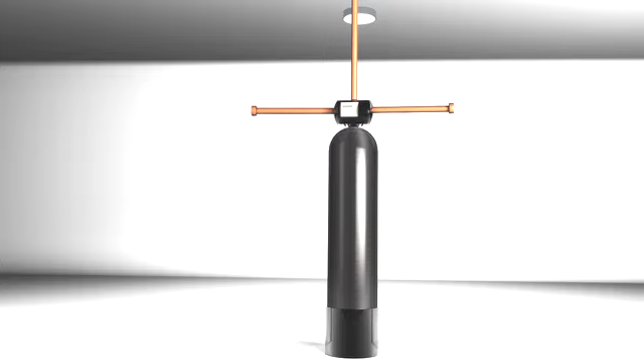From the simple to the more sophisticated, ProSystems products provide the very best in quality and performance. Our carbon filtration systems can provide bottled quality water without the bottle or the bother. And in this video, you'll see how it works. But before we see the process, it's important to become familiar with the elements of the system.

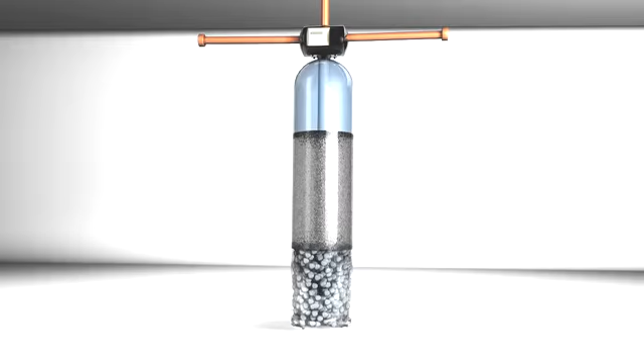First, we have freeboard. Freeboard is the area where carbon is allowed to expand. This allows the dirt that is collected on top of the carbon bed to be flushed out. Every regenerating filter system has freeboard.

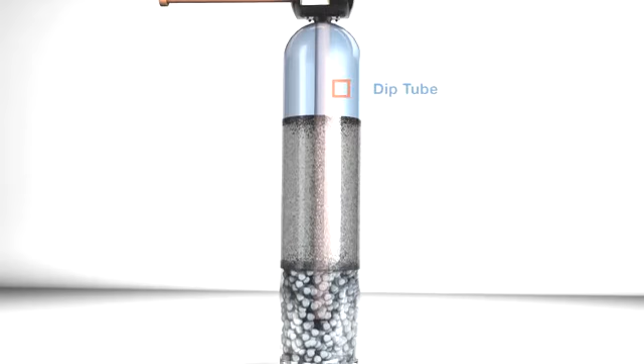Next, we have the dip tube. This tube is also known as the distribution tube or riser tube. This is the part of the filter that the treated water travels through after it's been filtered on its way to the tap.

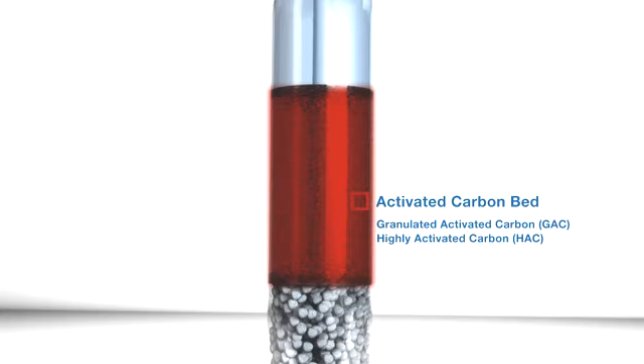The next element is called activated carbon or AC. This is the carbon-based product that actually filters and cleans the water. This material is also referred to as granulated activated carbon or highly activated carbon. It's our opinion that not all activated carbon will perform the same.

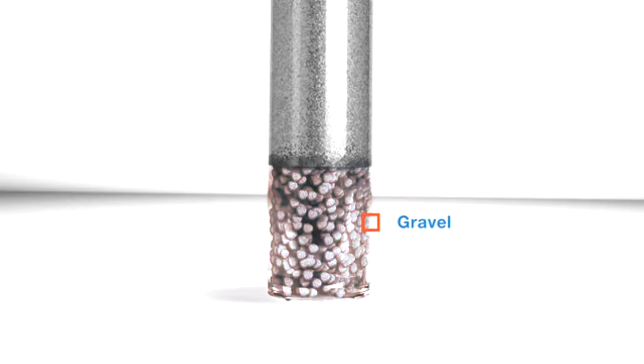Next, we have a layer of gravel. The gravel area is designed to protect the lower basket of the dip tube. This basket keeps the carbon media from entering the dip tube and passing into the home. The gravel surrounds the basket, which also keeps the carbon from entering into the basket and clogging it.

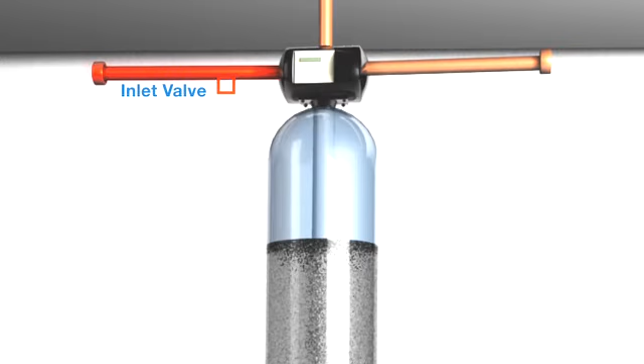Back at the top of the system, you'll find the inlet from the main. If it's a rotary valve, it enters the system from the left. If it's a cam valve or a diaphragm valve, it'll typically come in on the right. Our system here at ProSystems is a rotary valve, so it enters from the left.

Lastly, you have the drain, which is on the top of the unit. This 3/4-inch diameter outlet exits the system from the top and drains to the outside of the home or to an approved location. Now that you've seen the elements, it's time to see how it works.

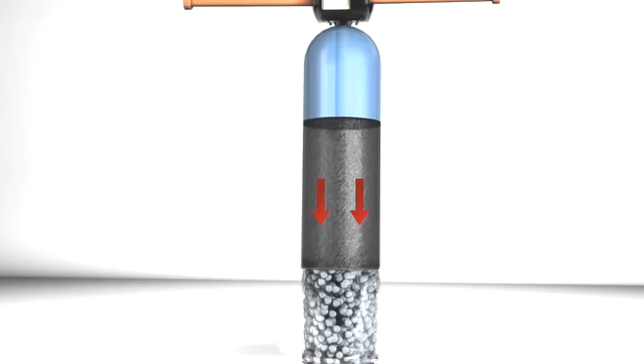By following the arrows, you'll see the process starts with water coming in from the main. The water travels through the valve head, turns, and passes down through the carbon bed. As it passes through the carbon bed, a lot of dynamic things are happening. Since the standard water pressure in most homes is somewhere between 40 and 65 psi, the water compresses the bed, making it almost impossible for large particulates to pass through.

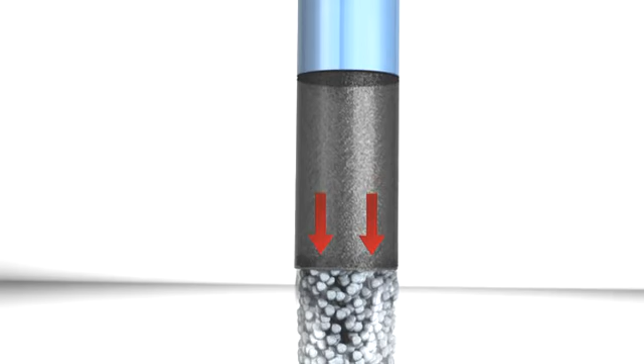Because of this compaction, as water passes through, dirt collects on the very top of the bed. After it travels down through the carbon bed and gravel, the newly filtered water is forced up through the dip tube and ultimately into the home for consumption.

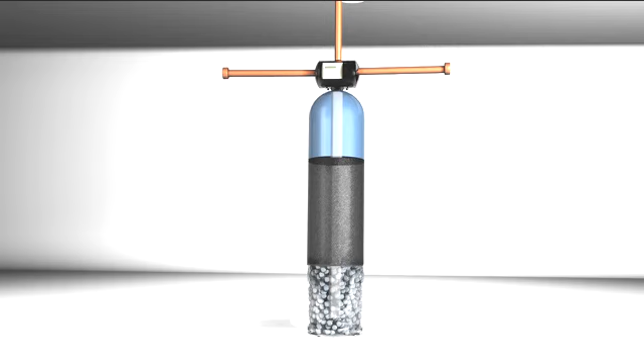As we learned, the carbon bed is compressed by water pressure. As a result, dirt and particulates will collect on top of the bed. In order to clean this dirt from the system, we must backwash the system by using a process called regeneration.

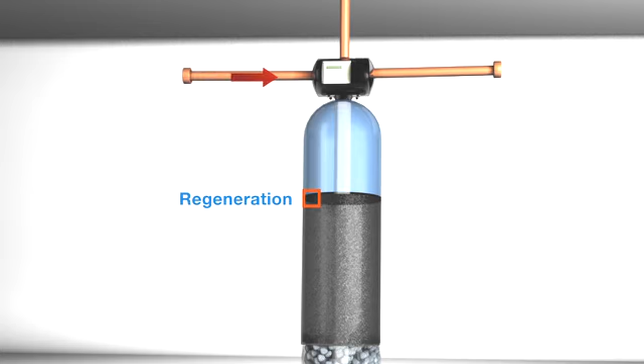Here's how it works. The process begins with water entering from the main as usual, but now the water turns and goes down the dip tube first. As the water reaches the bottom, it's forced up through the carbon bed. As water travels up through the bed, the pressure of the water causes the carbon bed to expand or loosen. This is called stratifying the bed.

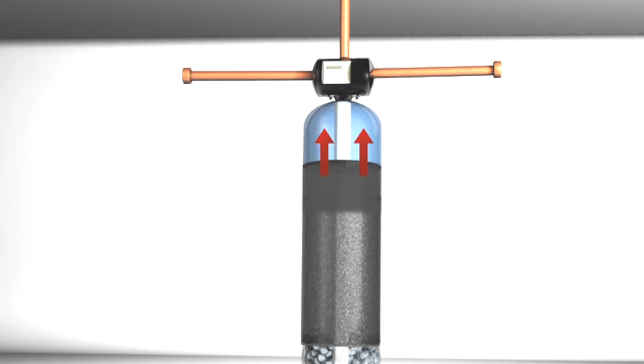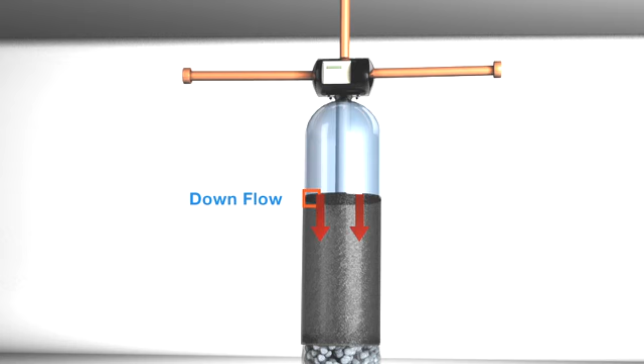When the water passes through the loosened bed, it forces the dirt and particulates to move up and out the drain. Since the dirt is on top of the carbon bed, it's the first thing to exit the drain. Remember, since this is a regenerating carbon system, you are free to drain to the exterior of a building. This is because the system filters in both directions. The main filtering process is called downflow. The regeneration process is called upflow.

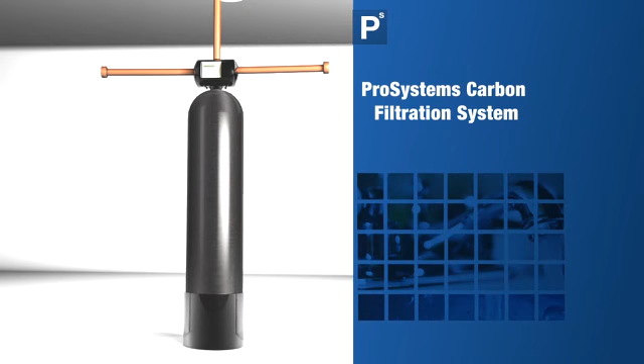I hope this has given you a clearer understanding of how a carbon filtration system works. All systems that regenerate will follow this process, regardless of brand. It's also important to note that this process happens either based on time or on volume. The ProSystems product is based on volume, but it has the ability to be based on time as well.